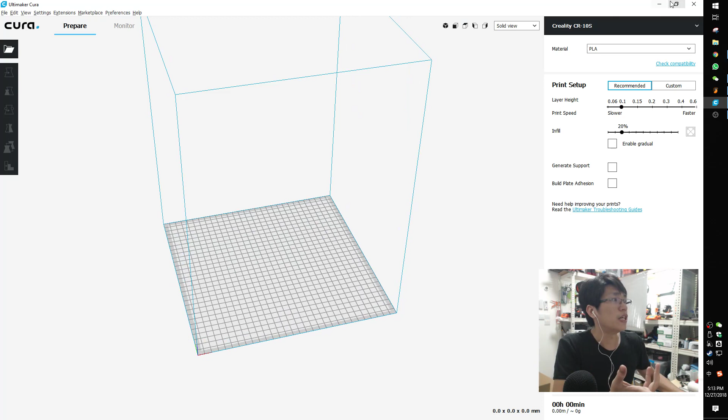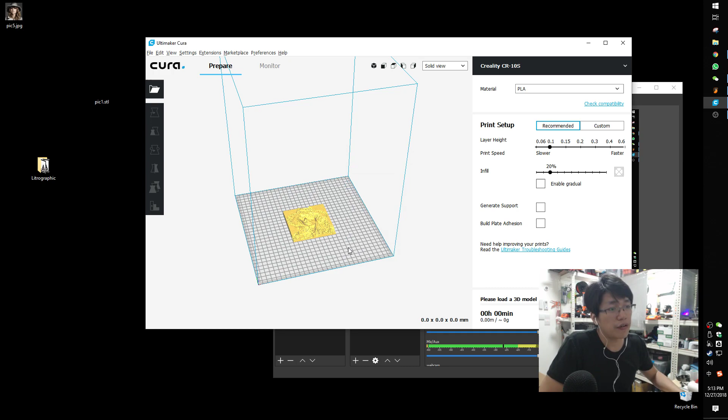Making the picture is very simple. You just use the built-in Cura software, drag and drop the picture you want, select the size—this is 100mm by 100mm, 10 centimeters. Set the base to 0.5, and make the darker areas higher because you want a flat face on the outside. You'll get this very interesting model—it converts the picture to a 3D model. If you look closely, it's just like some kind of mountain. Maybe you can use this technique to create a 3D model, who knows. But if you zoom out, it becomes a picture.

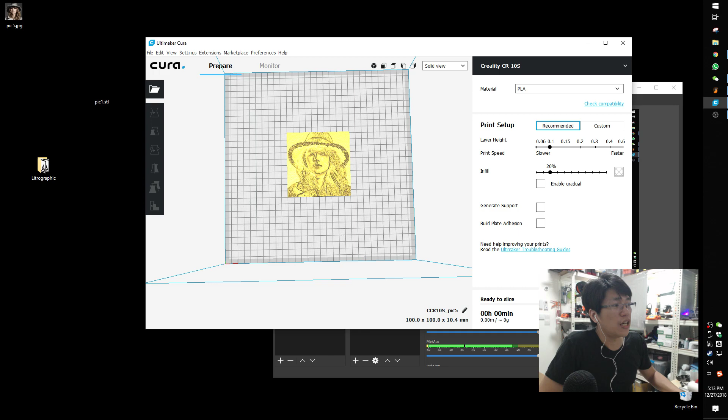Okay, you prepare it, then you can print it. But the problem is you create this without the bracket holders, without the extension, so you cannot put it in this printed box here.

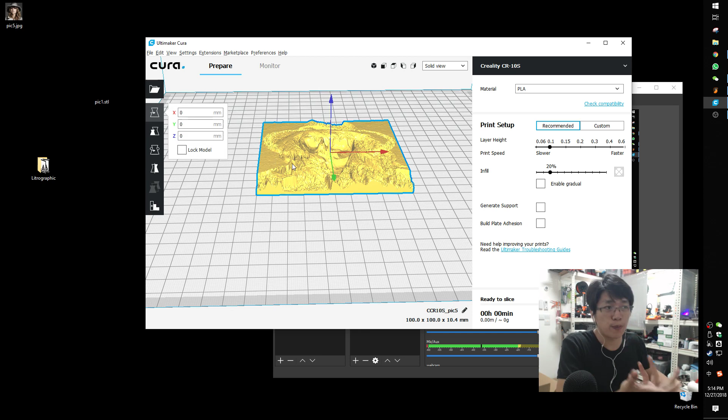So I got a quick tip for making this bracket. One option is if I want to export these files to some 3D modeling software like Fusion 360, I can add the bracket from the side, but there's a bit of a problem with orientation—you need to create a few boxes to extrude, this and that. That's quite fancy work. Maybe not everyone can do that, or is willing to.

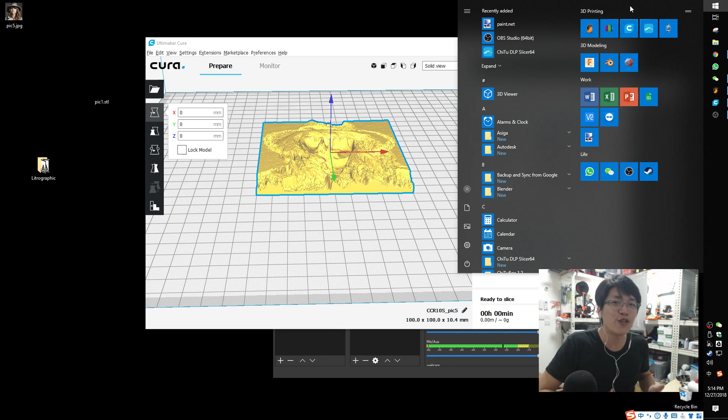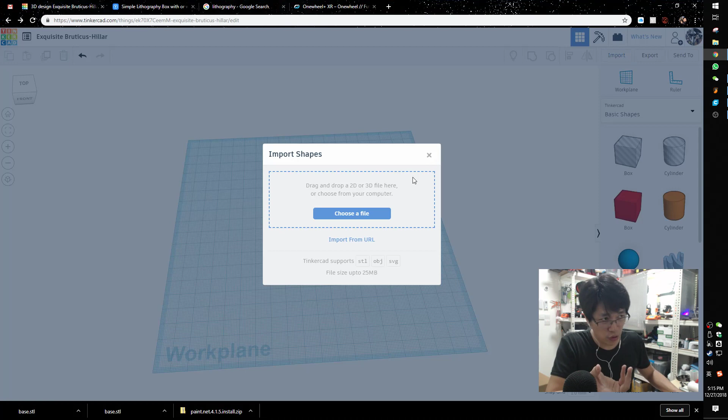I got a quick tip using Thingiverse—it's Tinkercad. This app creates a quick model, but you can't create directly from here because after you save the picture out, it becomes over 100 MB, and you can't import models more than 25 MB here. So that's a problem. But no problem—I'll still use it because it can help you make a box.

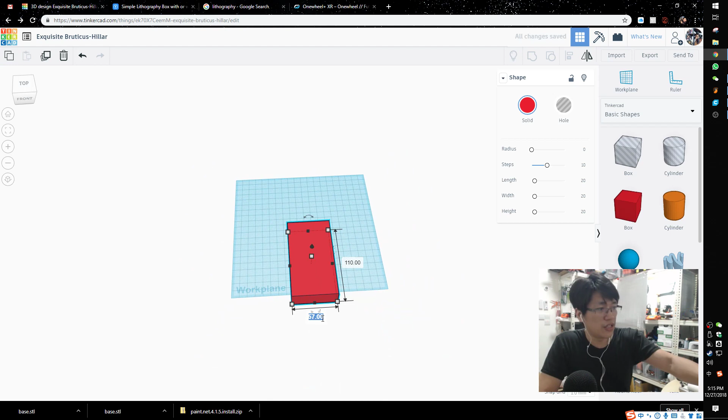You can make the bracket here and just type in the size. The bracket should be 11 centimeters, which means 110 mm, since here it uses the mm method. Change the height to 0.5 millimeter, and then you've got the whole bracket.

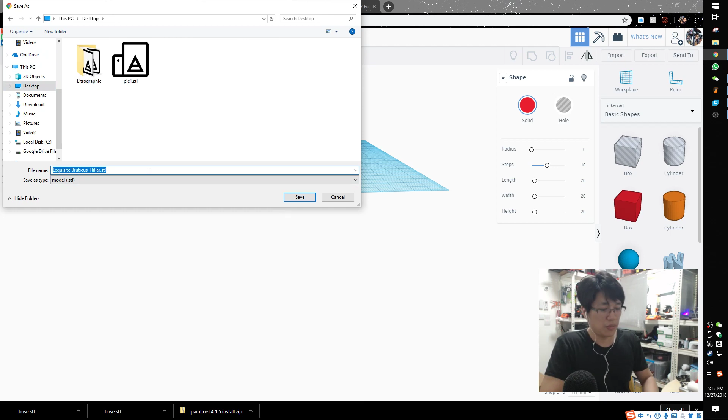So export the bracket—one piece of box—and just put it on the desktop. Put the base. So you've got the base, and you've got the picture. Oh, I haven't exported that yet. You can export this one.

In my case, I'm using a Prusa 3D printer, so I'm using their default slicer software. Let me export this one to STL. Now I've got two pieces of models.

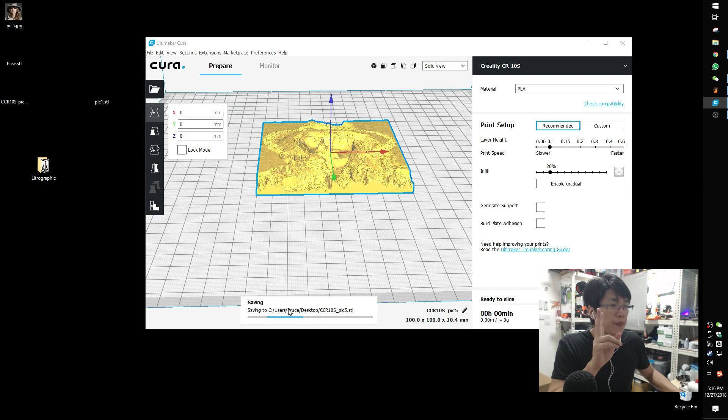Need some time to export. Come on. Okay, let's see the size—it's 72 megabytes, so you cannot import this one to Tinkercad.

If the file is small, you can just import it to Tinkercad and combine them directly. But in this case, I'm not going to combine them, to save one step of work.

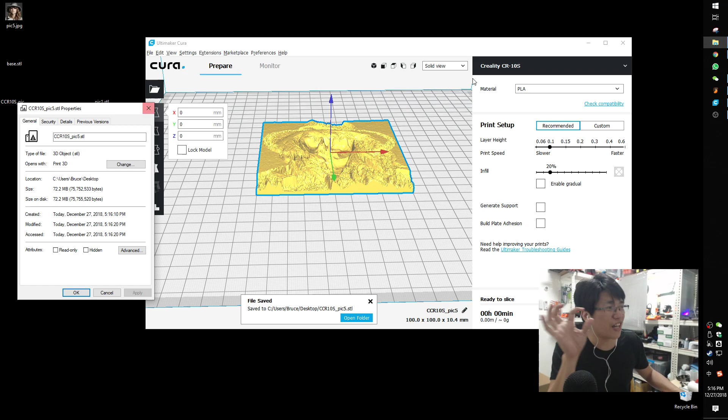Just put them inside the slicer—since the file is quite huge, it needs some time. Okay, put the base in. You'll see that if you don't do anything, it automatically centers the models. This is a good thing and a bad thing—if you have a lot of different parts you want to separate, that's easy, you just press the arrange button.

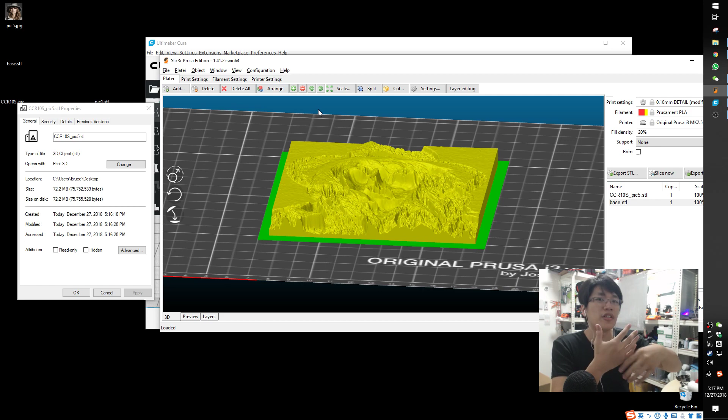By default, if you come to the middle—remember I typed the base height as 0.5mm, and this base is also 0.5mm—if you don't do anything, you just go slice it. If you combine them together as one piece, you get this beautiful lithography print, and you just print it out. After that, you can use it with whatever model you have.

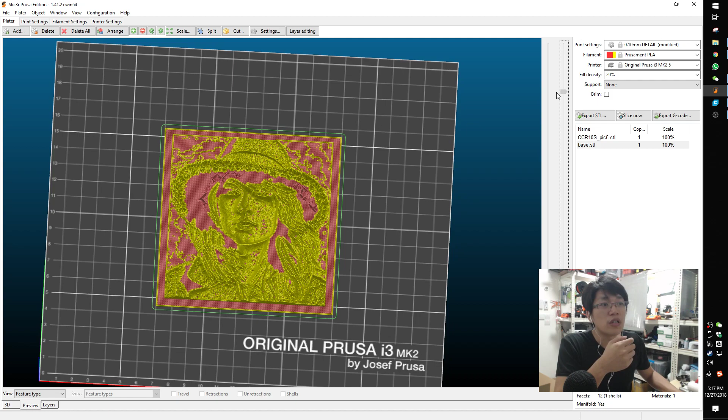That's it—these are quick tips for making a lithography photo, specially designed for these models, simple lithography boxes with or without text.

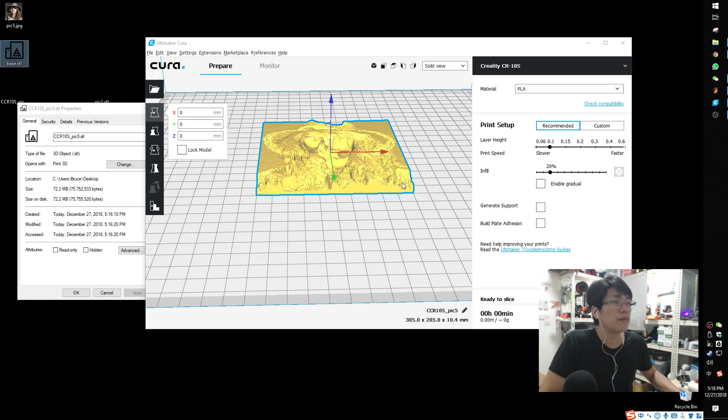Oh no. So if you want Cura's automatic arrange to keep things in the middle without moving out, you have to change some settings, but let's talk about that next time. I need to search for which setting to close, because I just changed computers and most of the settings aren't showing up yet. I need to open them up one by one—that takes some time, so we'll talk about it next video.